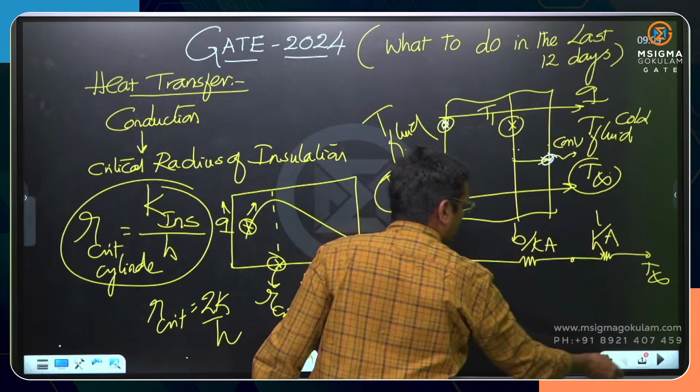For example, in the previous situation, if you had given this and this, how many resistances will be there? Only conductions. In this case, if you are given this one and this one, only 2 conduction resistances, one offered by this material and the other by the outer material. That kind of precaution we should always consider.

Then the most important topic other than this that will be asked is heat generation. In recent GATE examinations it is very commonly asked, particularly heat generation in a slab. Actually 3 geometries are there: slab, cylinder and sphere. Heat generation could happen in any of these 3 geometries, but it is most commonly asked in slab cases where uniform heat generation is assumed. Uniform heat generation, Q dot, watt per meter cube.

Okay, in GATE 22, non-uniform heat generation is asked, but that is one of the rare questions that is not generally expected. In GATE 22, if you see, there is a non-uniform heat generation. Heat generation is there, but it is non-uniform. That means at different locations, different amounts of heat are generated.

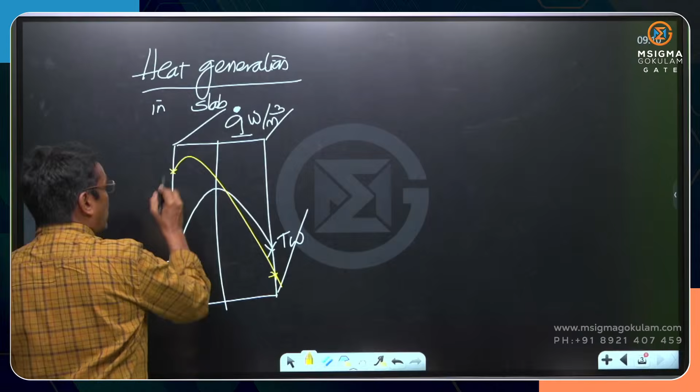But if you just think of it as uniform heat generation, any kind of situation may prevail. A symmetric parabola, in case both sides of the slab are at the same temperature, or sometimes it may be an unsymmetric parabola like this, in case this temperature is more than this. While in another case where one side of the slab is completely insulated, you may have this kind of temperature profile, but all the temperature profiles are parabolic.

Please remember that whenever you are doing a heat generation problem, the most important boundary condition to keep in mind is that the total heat generated in the entire body should be equal to the heat convected from the surface of the body to the fluid. The shape of the body could be anything, maybe a slab, a cylinder or a sphere. The total heat generated in the entire body should be equal to the heat convected to the surrounding fluid. Only then can steady state conditions be maintained.

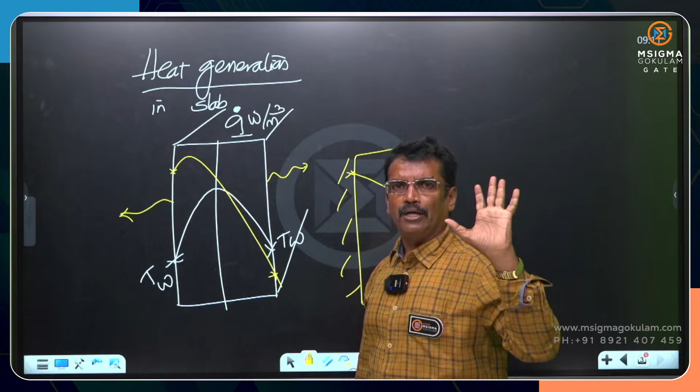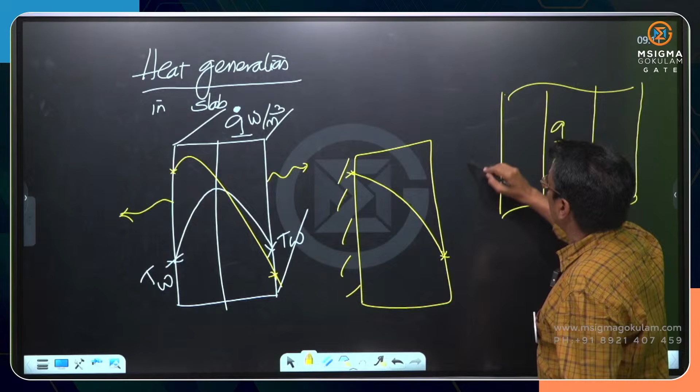This is the most important boundary condition we have to keep in mind, based on which there was a question asked in the recent GATE also. Actually, the situation was like this. There are 3 slabs given, with heat generation only in the center slab. These 2 slabs are not generating heat, but there is convection happening from the 2 sides. So how do you write the energy balance? The total heat generated only in this central slab should be equal to the heat convected from the left side plus the heat convected from the right side.

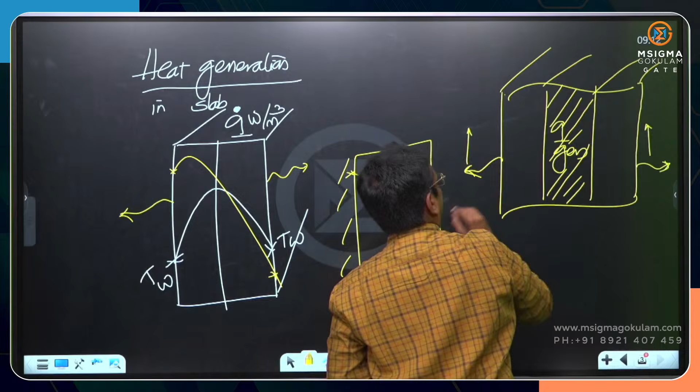There is no heat generation in these 2, but if you take the whole combined 3 slabs together as the control volume, for the steady state situation, because heat is generated only in the central part, this total heat generated should be equal to the heat convected from the right side plus the heat convected from the left side. This kind of energy balance we have to consider, particularly whenever you deal with heat generation inside a slab. Mind that if one side of the slab is completely insulated, at that location we obviously get the maximum temperature.

Generally what they ask is, in heat generation cases, where do you observe the maximum temperature and how much will the maximum temperature be? That is the very commonly expected question. At what location within the slab do you see it? Supposing the temperatures on both sides are the same, you will definitely see the maximum temperature at the mid plane, where there is a symmetric parabola.

If it is an unsymmetric parabola where these 2 temperatures are different, you will see the maximum temperature in the part of the slab where you observe more temperature. So here T1 is more than T2. You will see the maximum temperature in that portion of the slab which is closer to the higher temperature. But this is an unsymmetric parabola. If one side of the slab is insulated, this is also a parabola, but you will see the maximum temperature at the insulated surface. So these are the important cases you need to remember.

Okay, this is a very important case. You may expect the question, but all the questions are solved from this differential equation only. d²T/dx² + q̇/k = 0; this is the beginning point for steady state one-dimensional heat conduction with uniform heat generation. This is the starting equation: one-dimensional, steady state, uniform heat generation.

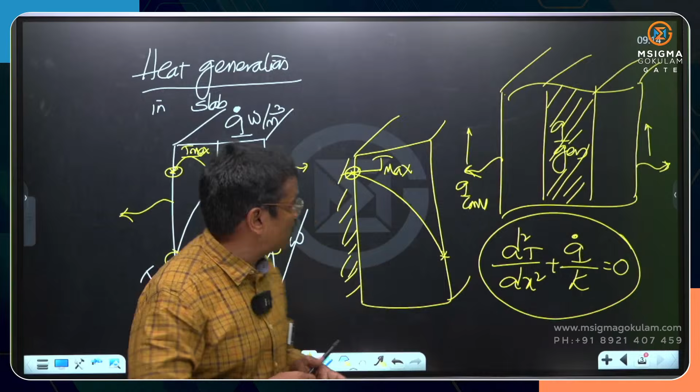But when you integrate that, you will get 2 constants of integration, because this is a second order differential equation. Those 2 constants of integration must be wisely evaluated from the given boundary conditions. Boundary condition, what do you mean by boundary conditions? What is happening here? That is at the ends of the body, no?

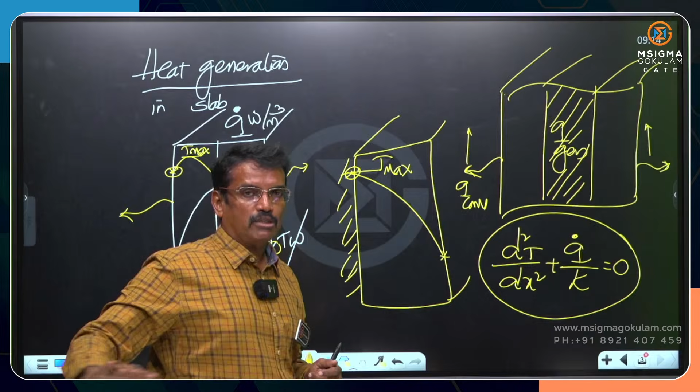But there is a boundary for every surface. What is the condition prevailing there? Based on which you have to evaluate C1 and C2, the constants of integration. That is how the entire problem must be solved while heat generation is being dealt with.

Then coming to the heat generation inside a cylinder, it is a parabola. It is definitely a parabola, with the maximum temperature at the axis and the surface temperature. This symbol is exclusively for the heat generation, uniform heat generation. So this is the fluid temperature.

What is the energy balance? Q generated is equal to Q convected from the surface, based on which you have to calculate TW, the surface temperature of the wire, and the temperature difference. It is always given by T naught, but where would you see the maximum temperature? At the axis. That will be given by Q dot R square by 4K.

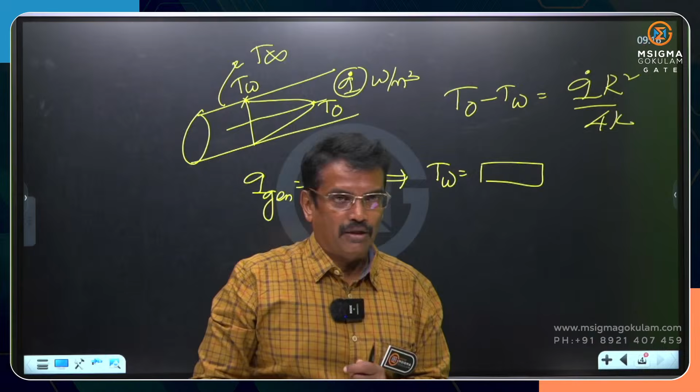So just try to write all the formulae in a concise and very precise manner, considering each topic. Say for example, if you take conduction, the heat generation cases are 3: slab, cylinder and sphere. Just write the 3 formulae, and the question is most likely to be expected, particularly in the conduction chapter. Okay, this is the temperature difference between the axis and the surface.

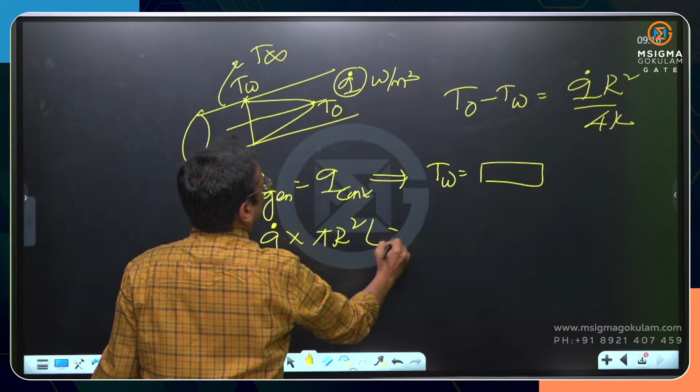Then you may ask, how to get the surface temperature? That is obtained from the total heat generated. What is the total heat generated? Q dot, which is always given per unit volume, into pi R square L is equal to H into 2 pi RL. That is the convection area from Newton's law of cooling.

Because whenever you talk about convection, what law comes to mind? It is Newton's law of cooling. From that, you will be calculating the wall temperature. Once you get the wall temperature, you can get the axis temperature, which is the maximum. Parabolic only. This is also parabolic.

Please remember, whenever you are dealing with heat generation in any body, the temperature distribution by default will be parabolic. Whether it is a slab or a cylinder or even a solid sphere, it is also parabolic. Here the maximum temperature is at the center, and the surface temperature is TW. But here the temperature difference is Q dot R square by 6K.

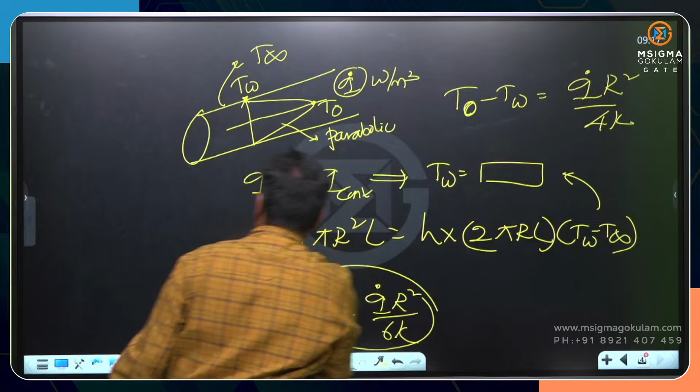6K here. Here it is 4K. This is a sphere, whereas that is a cylinder. Slab also I have shown. So heat generation is a very important topic in conduction.

Then another important thing is fins. In the fin cases, only remember the second case, insulated tip. That most commonly will be asked. Only 2 formulas: square root of HPKA into T naught minus T infinity into tanh ML, hyperbolic tan. M is the root of HP by KA.

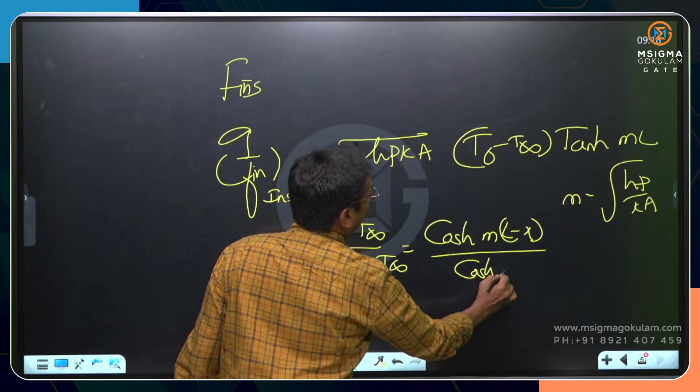Generally in fins, the things most likely to be asked are the heat transfer rate and the temperature distribution, T minus T infinity by T naught minus T infinity, which is a hyperbolic cos function. Just try to remember this formula, only for the insulated tip case, very commonly asked.

So the idea of this last 12 days preparation will be to give more focus to certain areas where questions are very commonly expected in GATE. Okay, so M is the root of HP by KA, but take care of the units there. A is the profile area or the cross-sectional area, and P is the perimeter, right?

So from this we may get the temperature, and 2 other things are there: efficiency of the fin and effectiveness of the fin. Efficiency is tanh ML by ML. All these formulae hold good only for the insulated tip case, where the tip is not losing any heat by convection. Effectiveness is Q with fin by Q without fin.

This is also another important formula that may be asked: Q with fin by Q without fin. What is efficiency of the fin? Q actual divided by Q maximum possible.

The definitions, just remember the definitions. What is actually happening? That is the actual. What could be the maximum possible? When will the maximum possible happen? Only when the entire fin is at the same base temperature, at the root temperature. So the maximum possible heat transfer rate can happen from the fin only when the entire fin is at the root temperature or the base temperature.

That is when the material of the fin has got infinite thermal conductivity. Only when the conductivity of the fin material is infinity will the whole of the fin be at the root temperature or the base temperature. Then the heat transfer rate happening under that condition is the maximum possible. What is actually happening is, the material will have a finite conductivity. Under that finite conductivity case, this is actual.

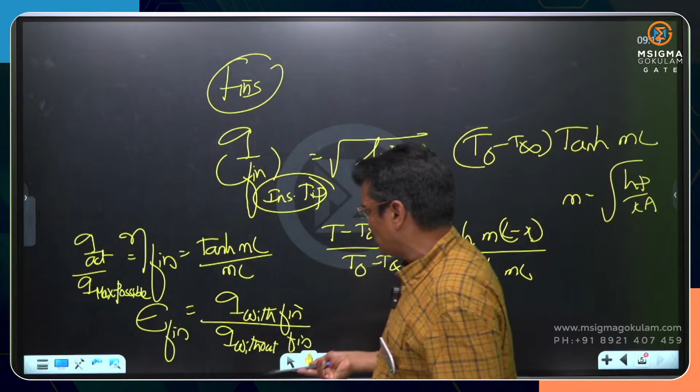The ratio of actual to maximum possible is the efficiency of the fin, and this is the effectiveness of the fin. Both are different, okay. So these are the things that may be asked in the fins there. And above all, in the conduction chapter, the most important topic that may be asked is the lumped heat analysis, where we talk about the Biot number. The condition for the lumped heat analysis is Biot number should be less than 0.1.

The definition of the Biot number also remember. The definition formula is hS by K of the solid. This is the formula for the Biot number. Lumped heat analysis is a very commonly asked question in the conduction chapter of the heat transfer subject. And what is the significance of lumped heat analysis? Temperature is only a function of time; no internal temperature gradients, no internal temperature differences. That is the meaning of lumped heat analysis.

This is the condition: Biot number should be less than 0.1. What is the definition of the Biot number? hS by K. But that S will be taken wisely. S will be volume by area. The S of the sphere will be R by 3 for the spherical body. And in one of the GATE examinations, what is the S for the plate? If this is a thin plate of thickness L, S will be L by 2, for a thin plate which is convecting heat from both sides. So S will be selected for different geometries.

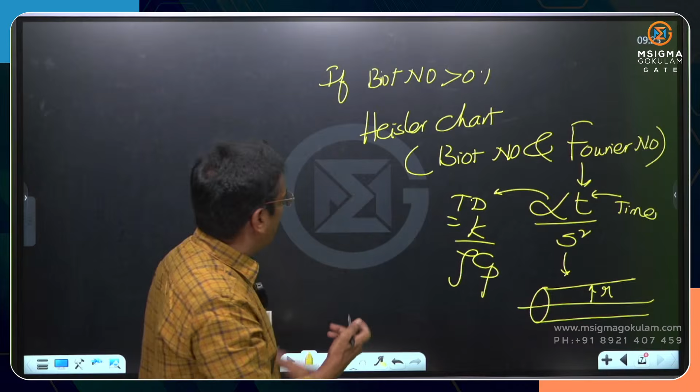Then coming to the easiest topic, heat exchangers. Easiest only because we have only two things there. Just revise LMTD and NTU, that's all. But take care of the special cases. What are the special cases? In case m dot h Cph is equal to m dot c Cpc, this is a very important case, very often asked in heat exchangers, which is called a balanced heat exchanger.

Particularly the balanced counterflow heat exchanger is a most commonly asked question, wherein this is the only case where you see the temperature profiles as straight lines. Balanced counterflow heat exchanger, what will happen there? And in case one fluid is undergoing phase change, for example steam is condensing and cooling water is getting heated up, this is a special case.

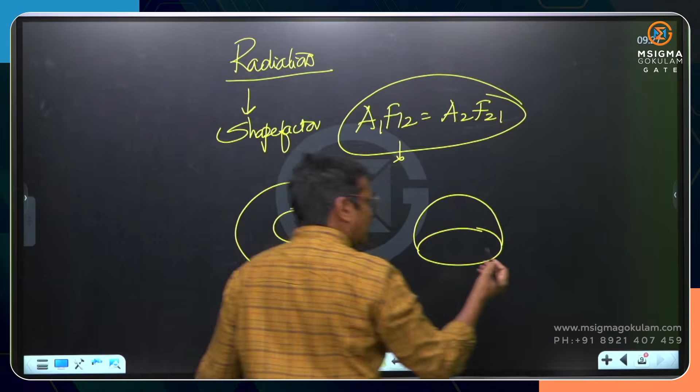The geometry could be anything. You may have two concentric spheres, a circular plate surrounded by another surface, two infinitely long concentric cylinders, or a hemispherical shell with a spherical body inside. But for all of them this is a rule: when one body is completely surrounded by another, the shape factor of the inner body with respect to the outer body is equal to 1. Remember that.

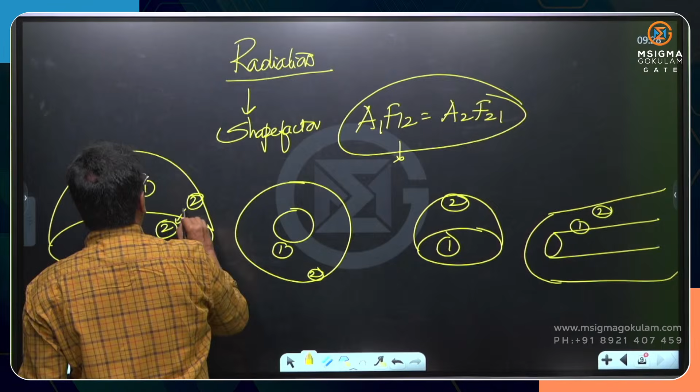In all these cases F12 is 1; for the very long cylinders F12 is 1. Here the inner body is 1, the outer is 2, and F12 is 1. So you can easily calculate F21 based upon the areas. Please revise this; you are almost sure to get one question from it.

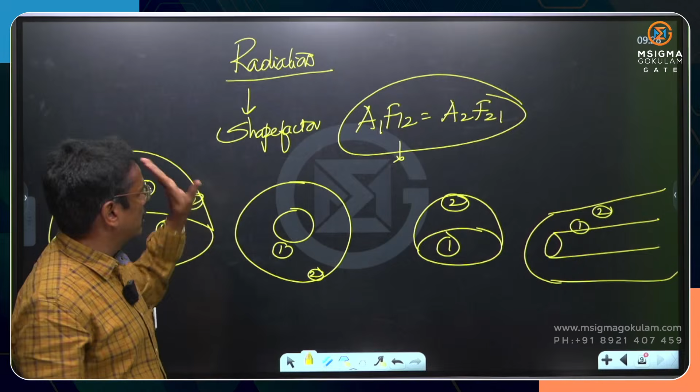And then Wien's law and Stefan-Boltzmann law. These are the very important things you may expect in GATE regarding radiation. Lambda m into T is equal to constant, for a black body. For a black body, the monochromatic emissive power could be indicated with respect to lambda for three different temperatures, T3 greater than T2 greater than T1.

This is the variation of lambda m. See that as the temperature is increasing, lambda m is getting reduced. Lambda m is the wavelength at which E b lambda is maximum at a given temperature. Lambda m into T is equal to constant. That is a usual question expected on the radiation laws.

And Stefan-Boltzmann law, we know E b is sigma T to the power of 4, b for the black body. See, the central concept of radiation heat transfer is the black body. A black body has three characters: perfect absorber, ideal emitter and also diffuse in nature. So for the black body, all these laws were stated: Wien's law, Stefan-Boltzmann law and Planck's law of radiation. All three are intertwined laws.

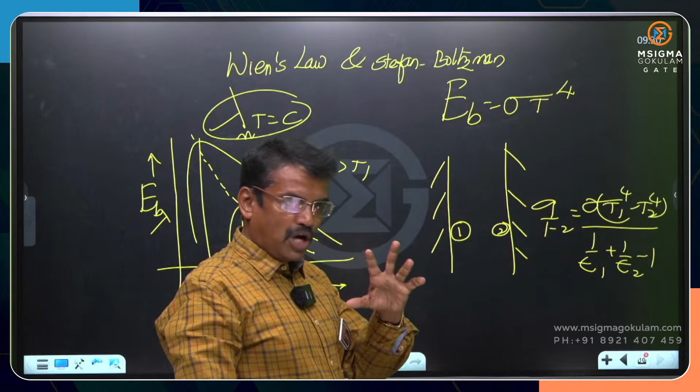Only one formula you just remember: sigma (T1 to the power 4 minus T2 to the power 4) divided by (1 by epsilon 1 plus 1 by epsilon 2 minus 1). This is 1, this is 2. These are emissivities, these are temperatures. The only precaution in radiation problems is to consider all temperatures in Kelvin; never write the temperatures in Celsius. This is a very commonly asked question, radiation heat flux between two infinitely large planes.

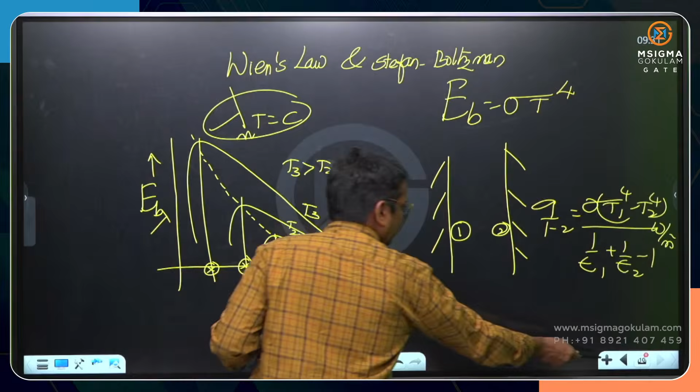Another important case is for infinitely long cylinders. If this is 1 and this is 2, it can be applied to any situation where F12 is 1 and F21 is less than 1. For all these situations, this formula is valid, for example infinitely long concentric cylindrical surfaces. This is epsilon 1, this is epsilon 2, this is T1, this is T2.

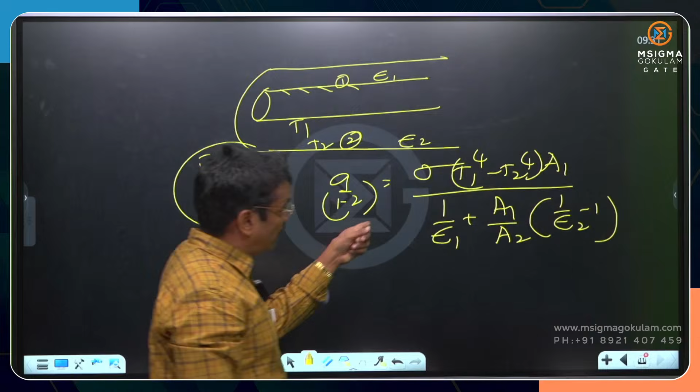Remember this formula. It becomes very useful if A1 is far less than A2. Then A1 by A2 tends to 0, and epsilon 1 goes up to the numerator. That means a small body kept in a large enclosure, where this formula becomes very useful. But this formula is valid for all cases whenever these two conditions are satisfied.

Then comes the radiation networks, where we define the surface resistance and space resistance. Construction of the radiation network is very simple if you understand the basic concept. Surface resistance is 1 minus epsilon 1 by A1 epsilon 1, space resistance is 1 by A1 F12. Only two kinds of resistances will be there. Generally there are two surfaces, sometimes three may be given. In recent GATE examinations, they have given three surfaces.

There are three surfaces exchanging heat: this is 1, this is 2, and this is 3. For drawing the radiation network, put one surface resistance on every surface. Between any two surfaces, keep the space resistance. That's it. Very easy to draw the network if you have some idea about these resistances.

Put one surface resistance on every surface, because the name itself suggests the resistance exists on the surface of the body. Every surface has a surface resistance. Between any two surfaces exchanging heat by radiation, there will be a space resistance. So give extra attention to drawing radiation networks. Luckily, if the body is black, the surface resistance becomes 0. Why?

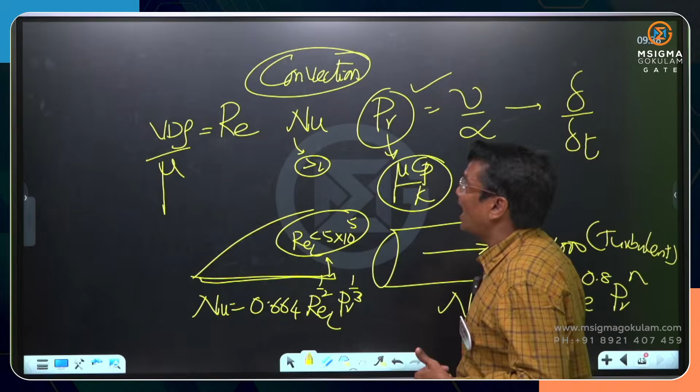And in free convection, there is only one number, that is the Grashof number, only in free convection. Revise that free convection definition, okay. Buoyancy force divided by viscous force. Some books will give it as inertia force into buoyancy force divided by viscous force whole square, but this definition is more prominent. This is the number that will replace the Reynolds number in free convection.

So, convection is all about the dimensionless numbers and the decision of laminar or turbulent and the relevant formula to apply. Okay. The very commonly asked question in convection is regarding the Prandtl number. So, n number of times questions were asked on the Prandtl number. So, this is all about heat transfer.

Coming to another important subject, thermodynamics, TD. In thermodynamics, the questions very often come from the first law and second law of thermodynamics. When you talk about the first law of thermodynamics, whenever you are attempting a thermodynamic problem, make sure what kind of system you are dealing with, whether it is a closed system or an open system, number one. What kind of working fluid you are dealing with, whether it is an ideal gas like air or a pure substance like steam or a refrigerant.

The third thing is what kind of process you are dealing with. Is it reversible? Is it quasi-static? Or is it irreversible? Try to make a judgment. Sometimes you may not be aware what kind of process is there. It may not be given. So make 3 inquiries about the thermodynamic problem: nature of the system, nature of the process, and nature of the working fluid. Very luckily, in most cases it may be air. Air is an ideal gas.

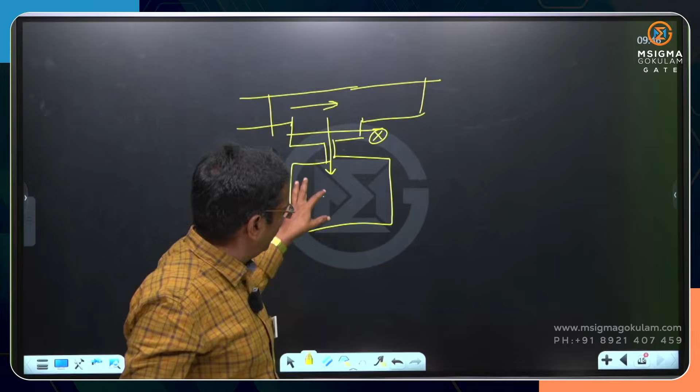Please remember the unsteady state. It is quite easy; only one equation you need to remember. It may be filling or emptying of the flask. Sometimes the flask is being emptied, with some fluid getting out through a valve. They will give the initial and final states and ask what is the mass of the fluid that has left the container. So that is regarding the energy balance.

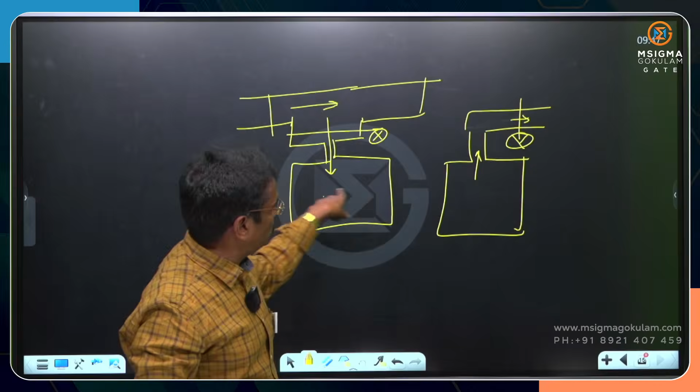After all, the first law of thermodynamics is the law of conservation of energy, which may be written for a steady or unsteady state. These two are the unsteady state situations: filling of the container, or emptying the container, or fluid going out of the container. So this is all about the first law and the law of conservation of energy.

Then, more important than the first law is the second law and entropy. Thermodynamics weightage is around 6 to 7 marks. Heat transfer weightage is around 8 to 9. Thermodynamics will be around 6 to 7 marks, 7 marks we can say. But most of the questions will be asked either on the first law or the second law and entropy. Second law and entropy come under one.

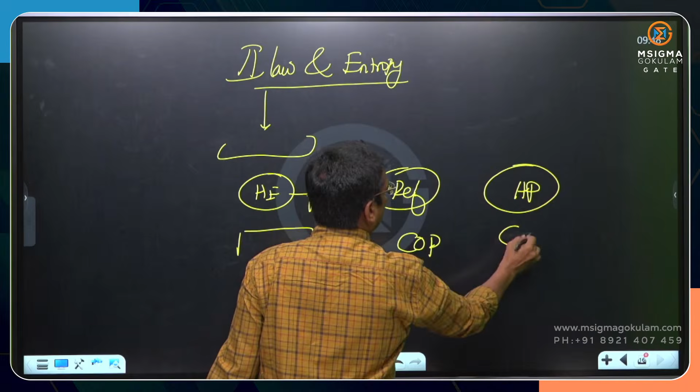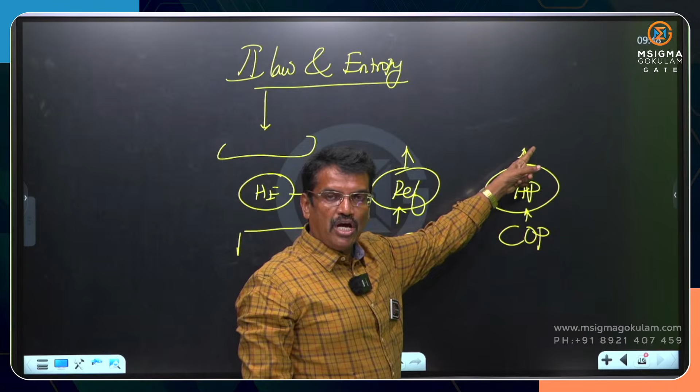Here the main thing in the second law is just to revise the heat engine concept, the refrigerator concept and the heat pump. For all the devices, you have to get the thermal efficiency and COP, how to calculate the COP for the heat pump. Refrigerator and heat pump both belong to the same category, obeying the Clausius statement of the second law, but based upon the useful effect, we call it a heat pump or a refrigerator. In the heat pump, the heat rejected is the useful effect wanted. In the refrigerator, heat absorbed is the useful effect wanted. But both require work to be done. They are work absorbing devices, whereas the heat engine is a work producing device.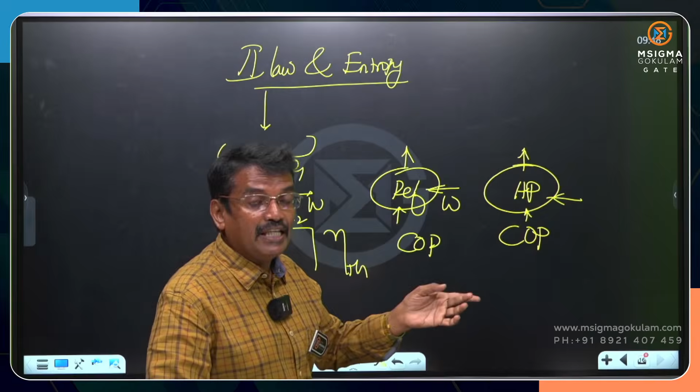Here we define the thermal efficiency. Just recall those definitions: thermal efficiency and COP. For any refrigerator, any heat pump, any heat engine, we have general definitions of efficiency and COP. In case those machines become Carnot, you know that the thermal efficiency of the Carnot engine will be in terms of TH and TL, only temperatures. This is the reversible heat engine or Carnot heat engine. And for a refrigerator there is the COP of the Carnot refrigerator. Remember them, recall them: Carnot refrigerator, COP of the Carnot heat pump.

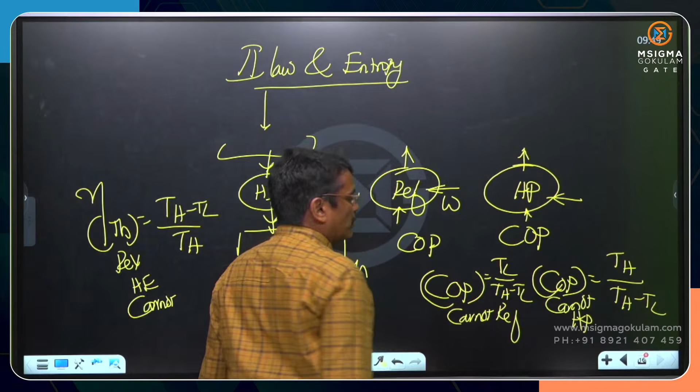For the reversible refrigerator, the COP is TL by TH minus TL, where TL is the low temperature and TH is the high temperature. For the heat pump, this is TH by TH minus TL. So if you add 1 to this, you will get the COP of the Carnot heat pump. COP of the Carnot refrigerator plus 1 will be the COP of the Carnot heat pump, right? There are certain formulae which can be written for any heat engine, any heat pump, and any refrigerator to get their efficiency or COP.

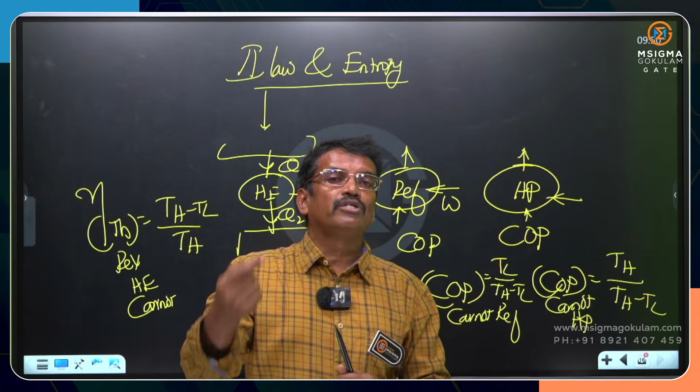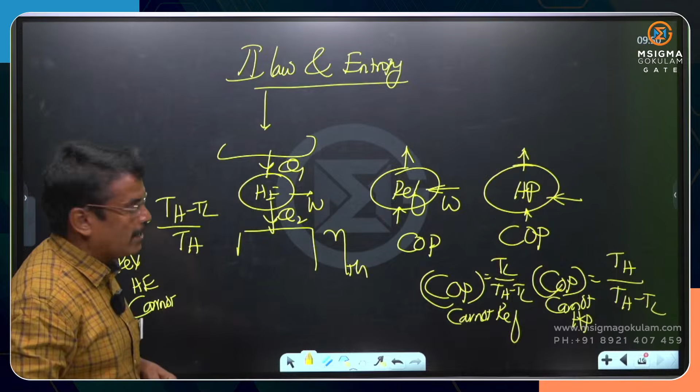But when you talk about the Carnot machine or a reversible machine, those formulae will be in terms of temperatures in Kelvin only. Keep all these temperatures only in Kelvin. Carnot formulae are all in Kelvin only. So that distinction should be made. Most of the time, they will ask about a heat engine driving a refrigerator, or a heat engine driving a heat pump, because the heat pump requires work, and the heat engine gives work, which will be supplied to it. So in these combination problems, one machine will be driving the other.

They may ask how much heat must be supplied to get this much heat rejection. Then you may have to use the general definition of the efficiency of this and the COP of this. Sometimes one machine may be Carnot, either the heat engine or the heat pump. When Carnot comes, you can write in terms of temperatures in Kelvin. If it is not Carnot, don't write in Kelvin, write only in terms of the energies. If you take this heat pump, what is its COP? Q rejected divided by work. These combinations are very commonly asked, and sometimes they use words like: what is the minimum work required? What is the maximum heat rejected?

When you read words like minimum work required, or maximum work obtainable, minimum or maximum words in the problem, guess that the machine may be working on the Carnot cycle, because only Carnot machines have maximum thermal efficiency if it is a heat engine, and maximum COP if it is a heat pump or a refrigerator. Only Carnot machines have the highest performance, whether it is a heat engine, a refrigerator, or a heat pump. So try to make that judgment. If you read minimum or maximum, think that the machine may be a Carnot.

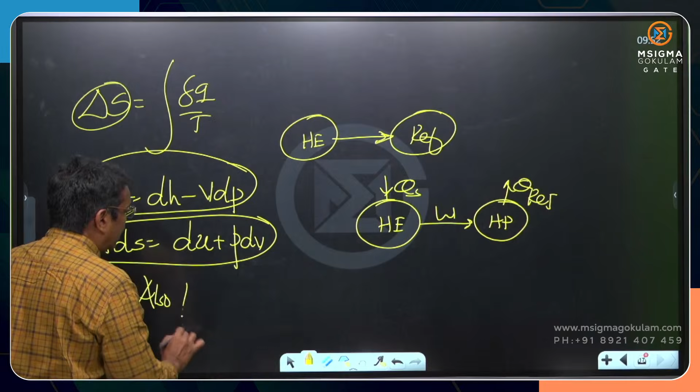And also for an ideal gas, dH = Cp dT, and dU = Cv dT. So these relations we may use here to get the change of entropy after integrating, because they are applicable for any pure substance, any thermodynamic process. Remember, these two relations, also called the TdS equations or the Gibbs equations, are valid for any thermodynamic process undergone by any pure substance, whether the process is reversible or irreversible. So this technique you have to use for calculating the change of entropy.

Another important thing is the Clausius inequality. The cyclic integral of δQ/T is less than or equal to 0. Less than sign for an irreversible cycle, equality sign for a reversible cycle. This holds whether it is a clockwise or anti-clockwise cycle. Clockwise cycle means a heat engine cycle. Anti-clockwise cycle means a refrigerator or heat pump cycle.

Give more focus to the Clausius inequality, because generally they will give one machine, maybe with 3 reservoirs like this, T1, T2, T3. We don't know whether it is a clockwise or anti-clockwise device; they just give a device. First they will ask you to check whether it is reversible or irreversible. They give these heat transfers Q1, Q2, Q3, and you have to follow the sign convention: when heat is supplied, positive; when heat is rejected, negative.

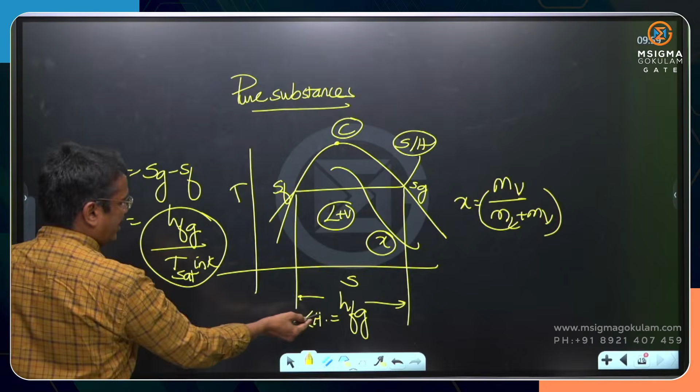When you are dealing with pure substances, we have to be very thorough with the dryness fraction, critical point, and above all, the triple point. Questions are asked repeatedly about the triple point. This is the fusion curve, this is the boiling curve. This is solid, this is liquid, this is vapor. All three phases coexist in equilibrium at the triple point. Questions are asked very often on the triple point.

What is the significance of the triple point? At the triple point, all three phases, solid, liquid and vapor, can coexist in thermodynamic equilibrium. Okay. And I have also solved a question about the triple point recently, about 10 days ago, when I gave the ISRO solutions.

In the very first thermodynamics question I solved, the same question was asked in GATE 21 regarding the triple point of ammonia. You may see that video also. I gave the ISRO solution 10 days ago. There is one question regarding the triple point of ammonia in Kelvin.

So they picked up the same question from GATE 21. What is the triple point? The triple point is where all three phases, solid ice, liquid water and water vapor, in the case of water, can coexist in thermodynamic equilibrium, and that is the reference state for measuring the properties of steam.

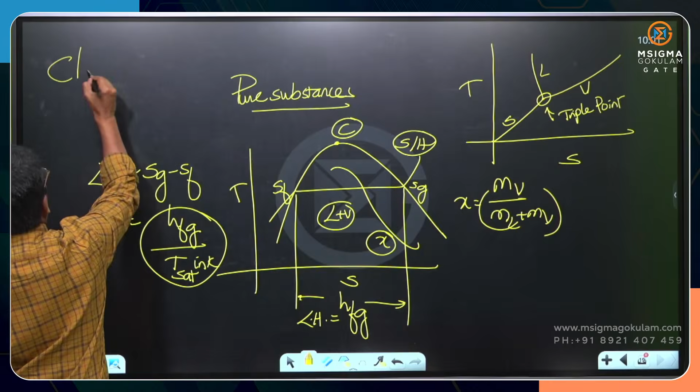Clausius-Clapeyron, that is the equation they are asking in properties of pure substances, that is dP by dT, the variation of the saturation pressure. It is given by h_fg by T_sat into v_fg. This is a specific value. This is the Clausius-Clapeyron relation for calculating the variation of the saturation pressure with saturation temperature.

For any pure substance, you remember that as the saturation pressure increases, saturation temperature also will increase. For any pure substance like water and refrigerant, as the P sat increases, T sat also will increase. So these are the very probable areas that may be asked in GATE regarding thermodynamics.

Coming to the third subject, very important subject, where the weightage may be around 7 to 8. Please give more focus to fluid kinematics. There will be many questions from this. When you talk about fluid kinematics, the very first thing we define is the streamline. What is that? What is the equation of the streamline?

Generally a flow field will be given, u i plus v j for two-dimensional flow. They will ask you to get the equation of the streamline. You will be given that function in terms of x and y. For two-dimensional flow, how to calculate the equation of the streamline, the velocity potential, stream function, convective and local accelerations, ax and ay. Give that more focus.

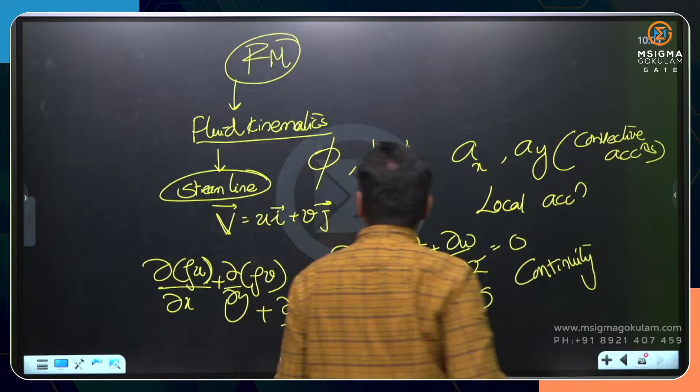As far as FM is concerned, please give more attention to velocity potential, stream function, condition for irrotationality. When do you call a given fluid flow irrotational? When it satisfies the Laplace equation, or when all three rotation components omega x, omega y and omega z are equal to 0. Mostly they will ask two-dimensional flows to make the problem simple, so just check omega z is equal to 0. For a two-dimensional flow on the xy plane, calculate omega z, the rotation component about the z axis. If it is 0, declare that flow irrotational, or otherwise find out the velocity potential.

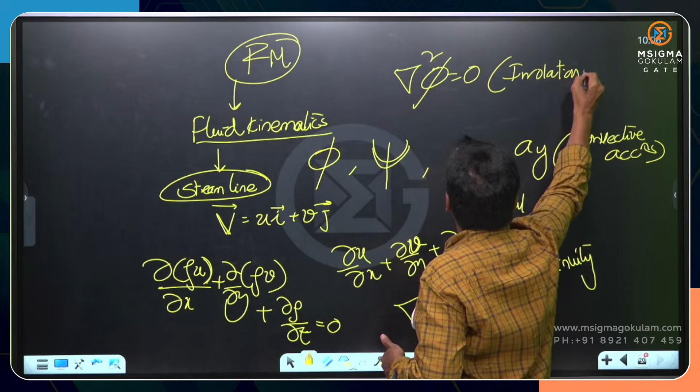If it satisfies the Laplace equation, del square phi is equal to 0, then the flow is irrotational. So the check for irrotationality is a very commonly asked question in GATE.

All the questions revolve around the equation of the stream function. If the velocity potential is given, how to calculate the velocity of the fluid at a particular point, how to calculate the accelerations along x and y directions. So give that area extra focus. Coming to the fluid dynamics part, nothing is more important than Bernoulli.

Bernoulli's equation is a central concept in fluid dynamics. It may be asked how to write that. The question may be asked like this: what is the velocity leaving, what is the discharge that is leaving, questions like that.

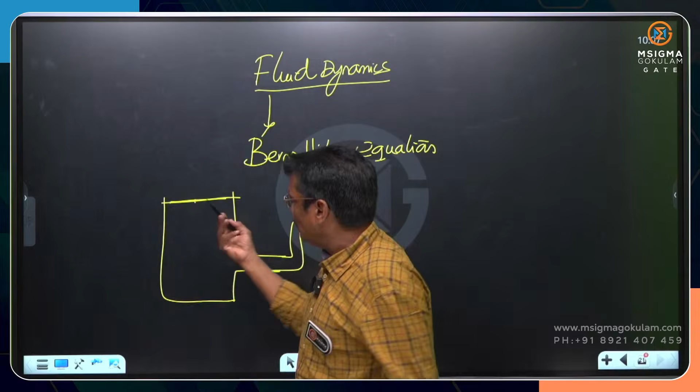Generally, when you are writing Bernoulli's equation, try to choose points which are open to the atmosphere, number one, and try to choose a point in a large area. If this is a large area, what is the velocity there? 0. What is Bernoulli's equation? P by w plus V square by 2g plus Z is equal to constant.

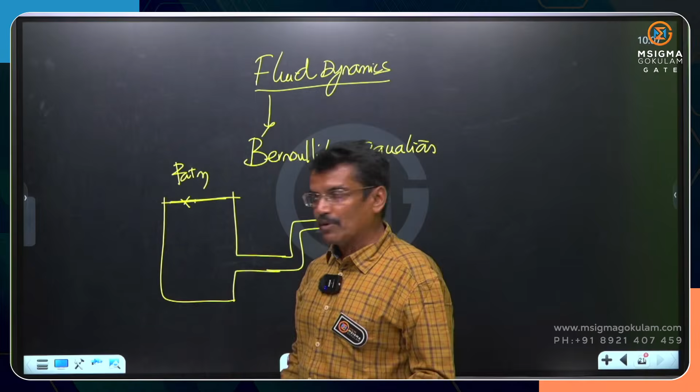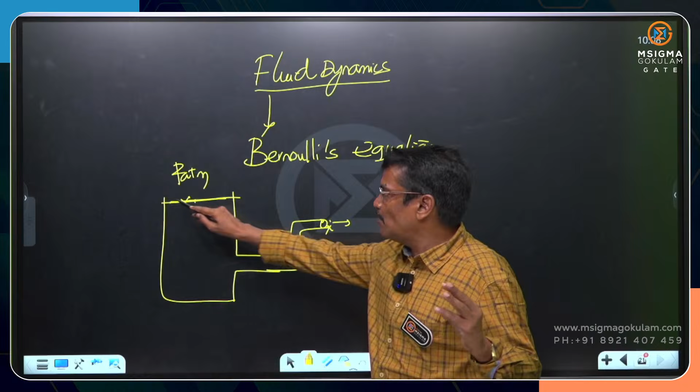Okay, when you take a point open to the atmosphere, then we are already aware of the pressure there, atmospheric pressure. If it is not given, take it as 101.3 kilopascal absolute. And if you are taking another point here, open to the atmosphere, here also the pressure is atmospheric. Therefore, many things will become easy to solve if you select those 2 points which are open to atmosphere, number one. If it is a large surface, obviously the velocity there becomes 0. One component has become 0.

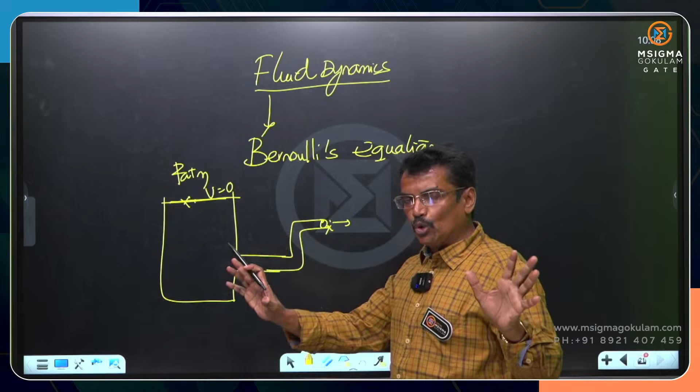Because Bernoulli's equation contains pressure head, velocity head and datum head. The sum of these 3 heads will be equal between any 2 locations if there is no loss of head. Sometimes Bernoulli's equation may be asked like this. They will give a pipe, give 2 locations, and ask you to decide the direction of the flow. Generally, you have to answer that the flow is always from a location where the total head of the fluid is greater than the total head at the other location.

Supposing the total head at one is more compared to the total head here, the flow is like this. What is the total head? P by W plus V square by 2G plus Z. So calculate at both the locations and decide the direction of the flow. Similar things they will ask from the thermodynamic point of view. Now they don't give water, they will give steam or gas. They will mention location 1 and location 2: whether the flow is from 1 to 2 or 2 to 1.

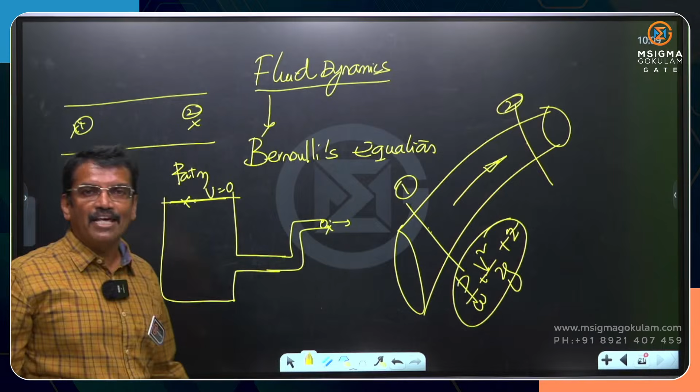It is an adiabatic device, they say, because in an adiabatic device entropy can never decrease. Questions asked about entropy can be very confusing and need critical thinking. With all my experience, I can definitely say that a person who clearly understands the concept of entropy understands the whole of thermodynamics.

Supposing he has given some ideal gas, air, with 2 stations, station 1 and station 2, and all the properties are given. He will ask you to decide whether the flow is from 1 to 2 or 2 to 1. What to do? From the given properties, we can calculate S2 minus S1. If S2 minus S1 is greater than 0, yes, because in an adiabatic system entropy either remains constant or increases.

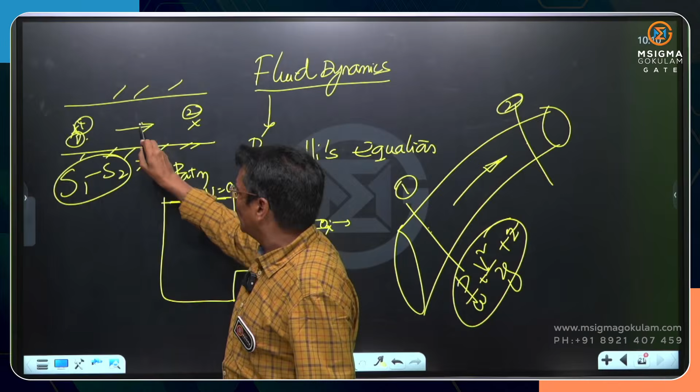But if S1 is greater than S2, the flow cannot happen in this direction. If the flow is happening in this direction, S2 should be greater than S1, or in the worst case equal to S1. It cannot be less, because that means in an adiabatic system entropy is decreasing. So the direction of the flow is decided based upon that limiting situation: in an adiabatic flow entropy either increases or remains constant.

If S2 is greater than S1, I can say the flow is happening from 1 to 2. If S2 is lesser than S1, the flow will be from 2 to 1. So that is how we have to answer the questions there. Okay.

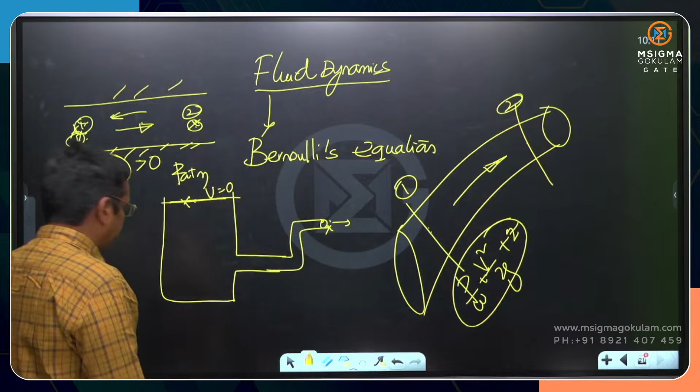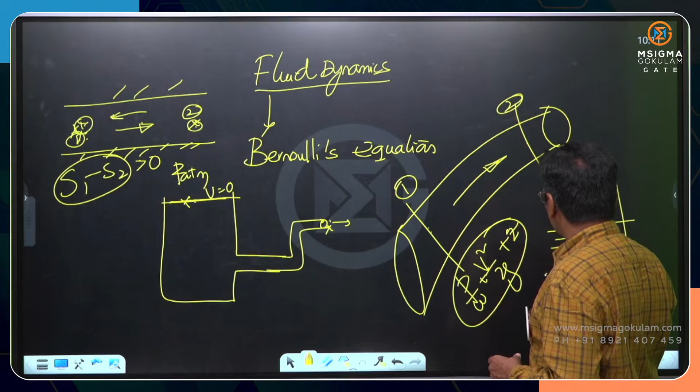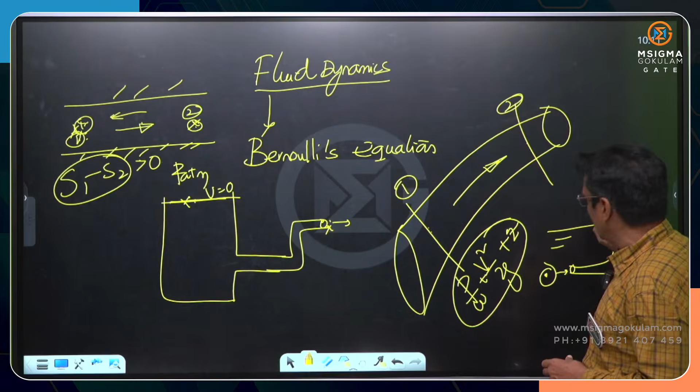Bernoulli's theorem, Bernoulli's equation: a question may be asked from the venturimeter application or a pitot tube. Very often the recent exams ask about the pitot tube. You have to write Bernoulli's equation between this location and that location. When the water enters, you have velocity head, pressure head and elevation, and here the velocity is 0 because the fluid has halted, so it has only elevation head there. So give more focus to two important devices while applying Bernoulli's equation: the venturimeter and the pitot tube, which is meant for measuring velocity.

Venturimeter is for measuring the discharge. Give a little more attention to those two devices, particularly when you are revising. Revise Bernoulli and its applications in the form of venturimeter and pitot tube.

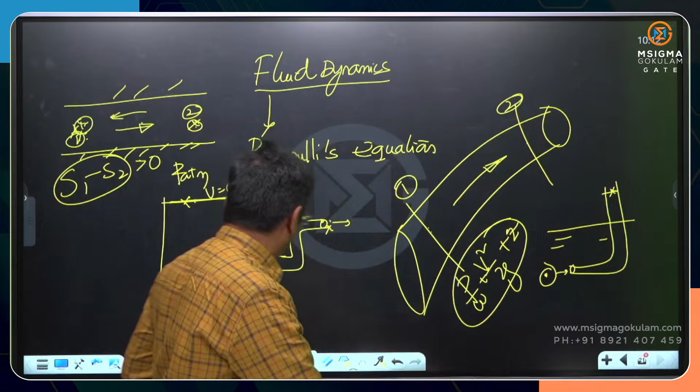Then coming to incompressible flow, a very important thing. Very commonly questions are asked, particularly about the Reynolds number. All 5 numbers you have to remember in FM: Reynolds number, Euler number, Froude number, Weber number and Mach number. All their definitions you should remember.

Euler number, inertia force by pressure force. Froude number, inertia force by gravity force. Weber number, inertia by surface tension. Mach number, inertia force by elastic force. The Mach number is important in that recently added topic called compressible flow.

First, how to calculate the Mach number: velocity of the fluid divided by acoustic velocity. This is the important number to decide whether the flow is compressible or incompressible. If the Mach number is less than 0.3, incompressible. If the Mach number is more than 0.3, compressible. Compressible flow means the number that strikes your mind is Mach number.

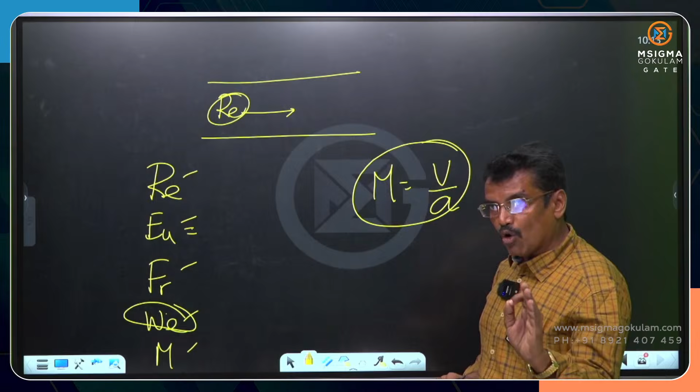Particularly for viscous flow through pipes, the main thing they may ask is the Darcy-Weisbach equation, head loss due to friction, fLV square by 2gD, number 1. Number 2, for laminar flow there is another important equation called the Hagen-Poiseuille equation, 32 mu VL by wD square. Just recall all the formulas. For laminar flow, Hagen-Poiseuille equation.

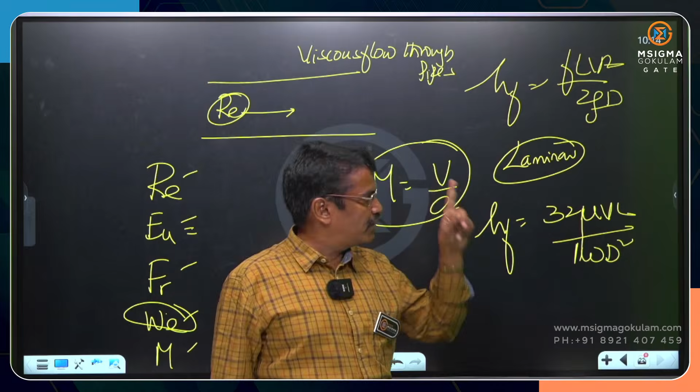Though fLV square by 2gD, called the Darcy-Weisbach equation, is for turbulent flow, many times we may write it for laminar flow also. That f is called Darcy's friction factor. Particularly for laminar flow, the friction factor is equal to 64 by Re. These kinds of relations, please remember.

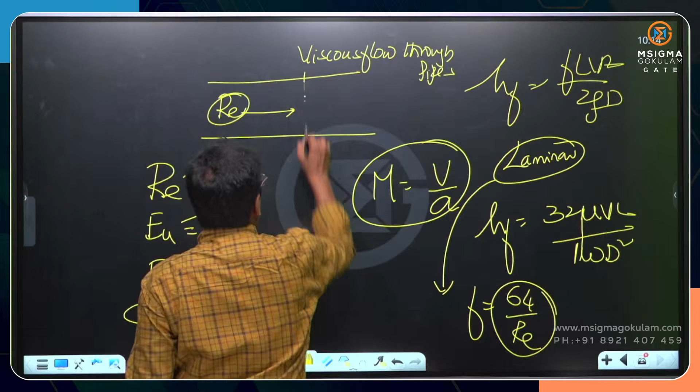And the shear stress variation and the velocity variation. We know that it is parabolic for laminar flow. If it is a turbulent flow, what is the velocity distribution? Logarithmic. If it is a turbulent flow, it is logarithmic. If it is a laminar flow, it is parabolic.

That velocity distribution is u equals minus 1 by 4 mu into dou p by dou x into R square minus r square. Recall this velocity distribution equation; in each chapter there will be around 6 to 7 formulae, just try to recall them. Minus dou p by dou x is called the pressure gradient, which is a constant, and can be taken as delta p by L, because pressure changes linearly with respect to x.

That kind of question may be asked in the objective. Shear stress varies linearly in a laminar flow. The velocity varies parabolically in laminar flow. Velocity varies logarithmically with respect to radius at a given cross section in turbulent flow. Those kinds of distributions.

How does the pressure change in the direction of the flow? How does the shear stress, which is a function of r, the radius at a given cross section, vary? Try to recall and revise them. These are definitely asked questions. They were asked and they will again be asked in viscous flow through pipes.

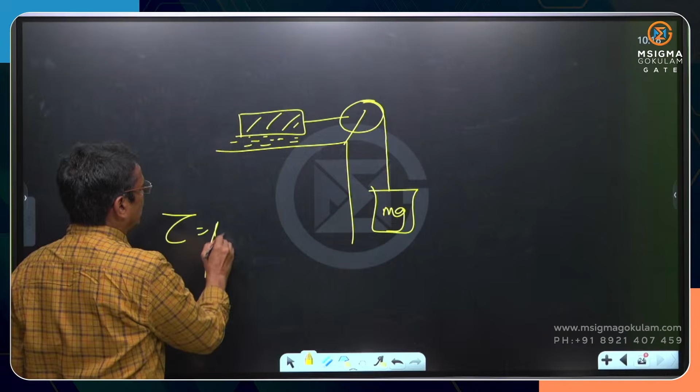When you talk about viscosity, they may ask like this: a block may be sliding over a viscous film. What is the terminal velocity of the block? Some weight will be given like this. How to write Newton's law of viscosity? Tau is equal to mu into dV by dy. So what is the velocity there? This gap will be given, and the dynamic viscosity value will be given. Otherwise, the kinematic viscosity and density will be given. Mu by rho is nu, kinematic viscosity. Mu is equal to rho into nu.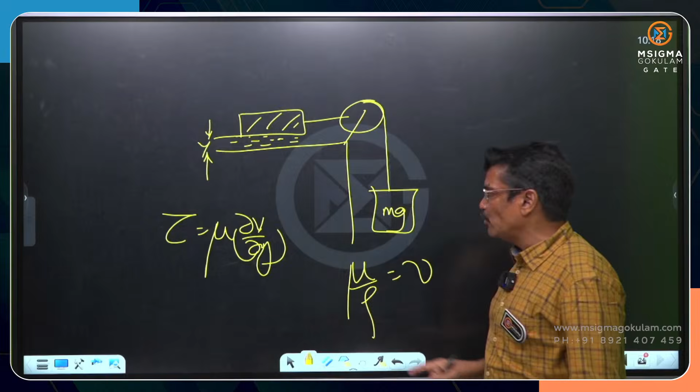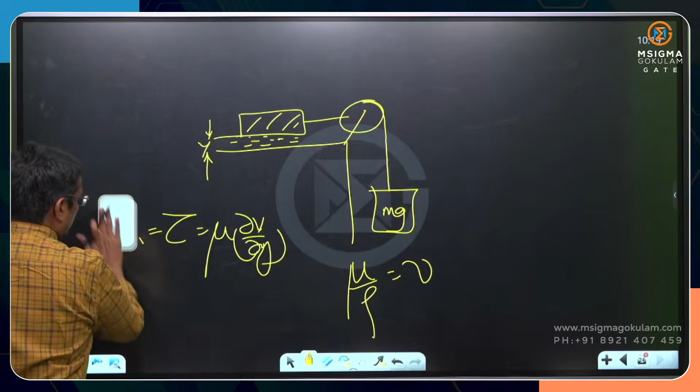So this is viscous stress, and viscous force is stress into area, like force divided by area gives the stress. You can take viscous force as the opposing force, T is the tension, and by writing the equation of motion you would be able to calculate the terminal velocity. In general, in most cases this velocity variation is taken as linear. So dV by dy, you can take it as V by y.

And buoyancy. Give more attention to buoyancy. Just carefully write the Archimedes principle, that is, the force of buoyancy is equal to the weight of the liquid displaced. And where is the center of buoyancy? More commonly, the conditions of equilibrium are asked for a floating body and for a submerged body. For a submerged body, the relative positions of center of gravity and center of buoyancy. For a floating body like a ship, how do you decide the conditions of equilibrium? The relative positions of M and G, meta-center and center of gravity. For a submerged body it will be different, for a floating body it will be different.

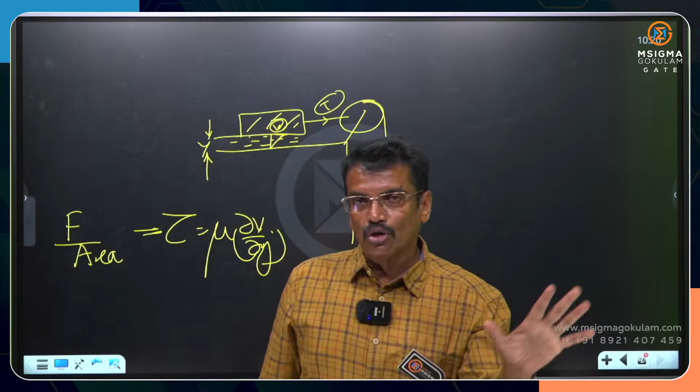Very commonly the objective questions will come from buoyancy, how to calculate the force of buoyancy and where the center of buoyancy lies. So, these are the topics where you have to focus more in fluid statics. Coming to the power plant, the most important thing is the Rankine cycle. And in the Rankine cycle, regeneration. Regeneration is very commonly, repeatedly asked. Regeneration, that is the bleeding of steam. Questions are very often asked on regeneration, bleeding of steam.

So, how much steam will be bled, how much steam will be extracted from the turbine for the bleeding. So, this is the regeneration. Please give more attention to regeneration. And how will the Rankine cycle efficiency increase? In what way can it be improved? By providing more superheating and by decreasing the condenser pressure. How to improve the thermal efficiency of the Rankine cycle? That is where they focus very often. Regeneration is a major, prime method of improving the thermal efficiency of the Rankine cycle.

Generally, by writing the energy balance and mass balance for the feed water heater used in regeneration, you can calculate how much mass of steam, for 1 kg entering, m kg is bled. What will be this m value? If 1 kg is entering, how much mass of steam should be bled or taken from the turbine? So, 3 pressures will be given: boiler pressure, bleeding pressure and condenser pressure. This is a prime area regarding the steam power plant and the Rankine cycle.

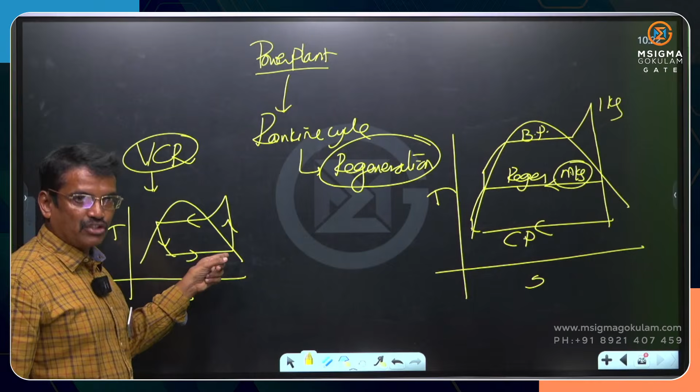To produce so much refrigeration effect, how much mass of the refrigerant is required? What is the tonnage? 1 ton is 3.5 kilowatts. They will give the tonnage capacity, and ask how much mass of the refrigerant must be circulated. That is one prime area in the VCR. Otherwise, they will give all the enthalpies. This enthalpy and this enthalpy will be different because it is a throttling process. So that area, COP definitions, tonnage and mass flow rate of the refrigerant required. Just focus on that.

VAR has never been asked in the recent past. VAR, just know about it. And air refrigeration, though it is included, is also not asked. That is quite easy. After all, the Bell-Coleman cycle or the air refrigeration cycle is just a reverse of the Brayton cycle. Gas turbine power plant: just like the steam power plant, you have the gas turbine power plant. Analysis of the gas turbine power plant is quite easy; you just need to evaluate the Brayton cycle. When you talk about the gas turbine power plant, focus on the Brayton.

And the Rankine cycle, when you are analyzing, just focus upon regeneration. How do you provide the regeneration? How much mass of the steam is bled? And the reverse of the Brayton cycle is called the air refrigeration cycle, also known as the Bell-Coleman cycle. Try to remember the COP formula in terms of the pressure ratio. And for the VCR cycle, vapor compression refrigeration cycle, you will be given all the enthalpies; how to calculate the mass flow rate of the refrigerant, given the tonnage. Just focus on that particular domain.

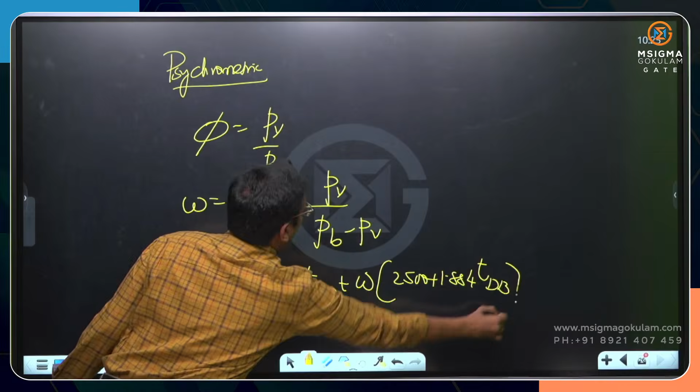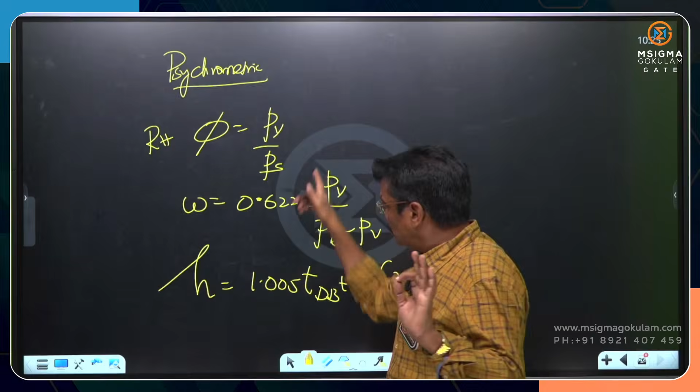And in the recent past they are asking particularly psychrometric relations. Only 3 relations, remember. Psychrometric relations: phi is equal to PV by PS, specific humidity is equal to 0.622 into PV by PB minus PV, and how to calculate the enthalpy of the moist air: 1.005 TdB plus W into 2500 plus 1.884 into TdB. This is the specific humidity or humidity ratio. This is RH, and where to take these pressures, you must be very careful. What is PV and what is PS, they will give the data in the problem.

How does the psychrometric chart look? Just give a focus on the psychrometric chart. How do the lines look? Constant enthalpy lines, constant wet bulb temperature lines. How to read various properties on the psychrometric chart, just have a look at them. If you just spend 5 to 10 minutes on the psychrometric chart, you can easily recall that, and these three relations, and again psychrometric processes.

All the psychrometric processes: sensible heating, sensible cooling, cooling with dehumidification, heating with humidification, adiabatic humidification, chemical dehumidification, what will happen to each psychrometric property. They may ask: in a chemical dehumidification process, what will happen to the dew point temperature? How to locate the dew point at a given psychrometric state? How to read the DBT, the WBT, the DPT.

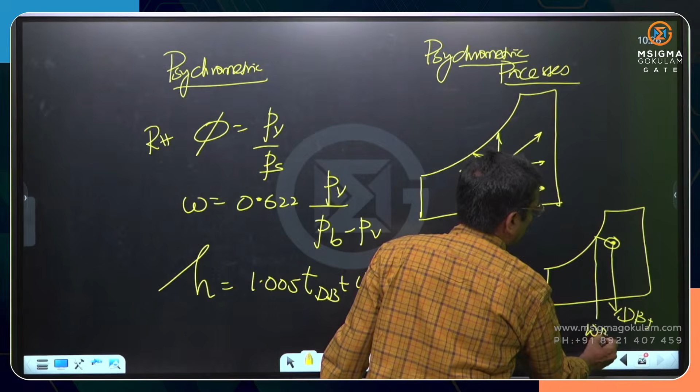Try to recall that. For unsaturated air, DPT is always less than the wet bulb temperature, less than the DBT. When the relative humidity is less than 100%, the lowest is the dew point, highest is the DBT, and in between you have the wet bulb temperature. So in the chemical dehumidification process, what will happen to the DPT? Or in the adiabatic dehumidification process, what will happen to the RH value?

Or in an adiabatic humidification, where the wet bulb temperature remains constant. Very commonly that is asked. The most commonly asked process in psychrometrics is adiabatic humidification, also called humidification without heat transfer. Very commonly asked.

In that process, the wet bulb temperature remains constant, and also the enthalpy of the moist air remains constant. The main two properties remain constant during this adiabatic humidification. One is enthalpy and the other is wet bulb temperature, and that process is very frequently asked in psychrometry.

Okay, and as far as the refrigerants are concerned, environment friendly, because the refrigerant which doesn't contain chlorine has got a zero ozone depletion potential, which means it won't damage the ozone layer since it doesn't contain chlorine. Make use of that formula like R113, R134. How to write the formula? Okay, there is a simple technique.

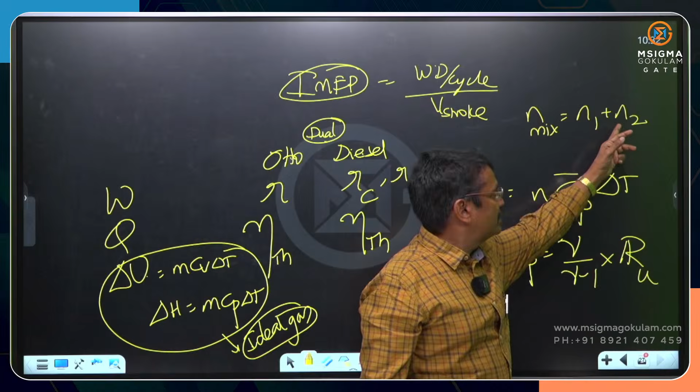And whenever you are dealing with mixtures of ideal gases, you always write the number of moles of the mixture is equal to N1 plus N2. If 2 gases are being mixed, what is the final number of moles? The number of moles of gas 1 plus the number of moles of the second gas. And PV equals nRT holds good for any ideal gas, need not be air.

And that PV is equal to nRT combined with this mass conservation; given all the data, we can calculate anything. Okay. When you are doing the problems, you may be writing the conservation of mass: sometimes M1 plus M2 is equal to the mass of the mixture. That is one way. Another thing is the number of moles of the mixture is the number of moles of gas A plus the number of moles of gas B. That you need to use, particularly when you are dealing with mixtures of ideal gases, as clearly mentioned in the GATE syllabus. Okay.

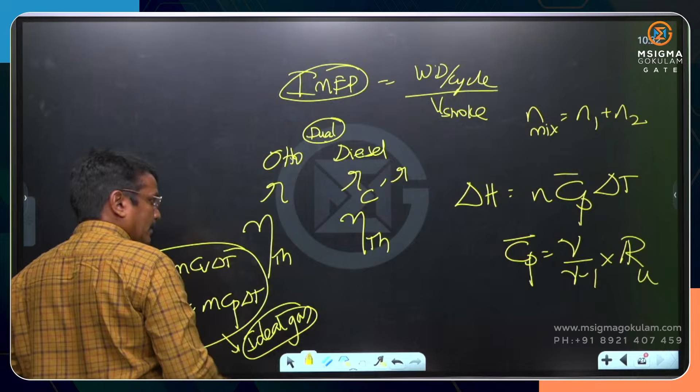This is one particular domain, and coming to the second domain, called mechanics and design, the most important subject there is strength of materials, SOM. When you talk about SOM, the guaranteed question is principal stresses and strains, Mohr circle.

That is a sure question, because when a solid element is subjected to biaxial normal stresses as well as shear, that is sigma 1, sigma 2, two normal stresses as well as the shear stress, how to draw the Mohr circle, and how to calculate the normal stress and the shear stress on any plane inclined at an angle of theta. Okay. This formula please remember.

How to draw the Mohr circle and what is the radius of the Mohr circle will differ in different situations. Sometimes you will have only one normal stress and only one shear; in such a case, sigma 2 becomes 0. Sometimes if one is compressive, take it as negative and the other as positive. We have a sign convention: one is tensile and the other is compressive, one is positive and the other negative. If both are tensile, both signs are positive, follow the sign convention, and the shear will be there.

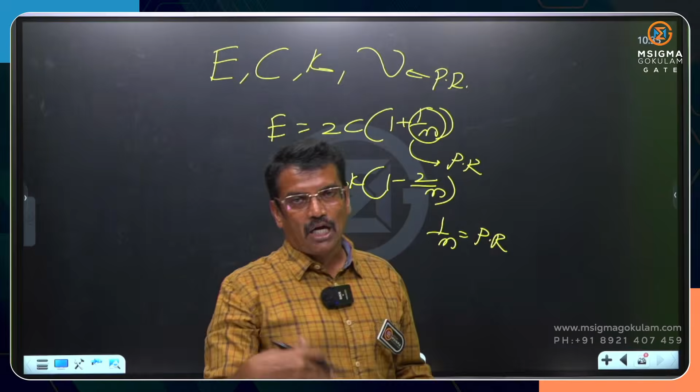Now we have E, C, K: Young's modulus, shear modulus, bulk modulus, and Poisson's ratio, defined as lateral strain by longitudinal strain. Those are four elastic constants. A simple isotropic elastic material needs only two to be remembered, because there are relations: E is equal to 2C into 1 plus 1 by m, where 1 by m is Poisson's ratio. E is equal to 3K into 1 minus 2 by m, and E is equal to 9KC by 3K plus C. If you just know two, all other things can be obtained. So these relations are there, and thermal stresses.

In simple stresses and strains, thermal stress is very important, in terms of the coefficient of linear expansion and change in temperature. Sometimes in an elastic member there will be loads, and some internal forces also. One member may be steel, another aluminum, another copper. So what will be the total elongation? The total elongation will be elongation of steel plus elongation of aluminum plus elongation of copper, and one member may be under compression and another under tension.

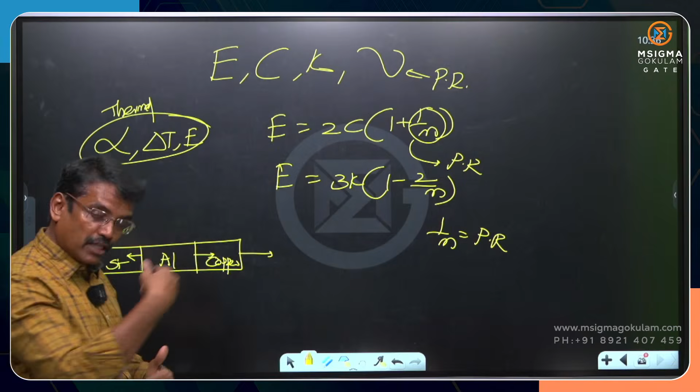Anything could happen. How to write the force balance: if you want to write the force balance for aluminum, take a section here. Left hand side forces must equal the right hand side forces, based on which we can decide whether it is compression or tension. If it is under compression, definitely there will be a decrease in length. So the total elongation of the member will be the elongation due to tension minus the decrement due to compression. So this is a very easy and prime area.

And stress strain diagram. Okay. And there only comes the proof resilience or modulus of resilience and the modulus of toughness. What is the proof resilience? Maximum strain energy stored up to the elastic limit per unit volume. And toughness, what is the meaning of toughness? Try to recall those properties.

Okay, the properties of the materials, proof resilience and modulus of toughness, and what is the meaning of strain energy. Strain energy concept is very important. Recently in 2023 also, a question asked in SOM was regarding the strain energy, strain energy due to the self weight. Okay, what is the strain energy? The energy stored inside the elastic member because it is undergoing the strain.

It is like a spring. When you compress the spring, there is energy stored inside the spring. When you elongate the spring, there is potential energy stored inside. In a similar manner, when an elastic member undergoes a strain, there is an energy stored inside that. That is called the strain energy. What is the maximum strain energy stored? What is the strain energy stored per unit volume? All these things are very relevant in the SOM.

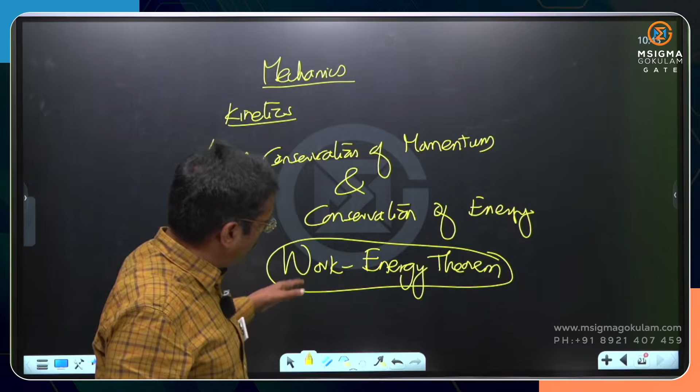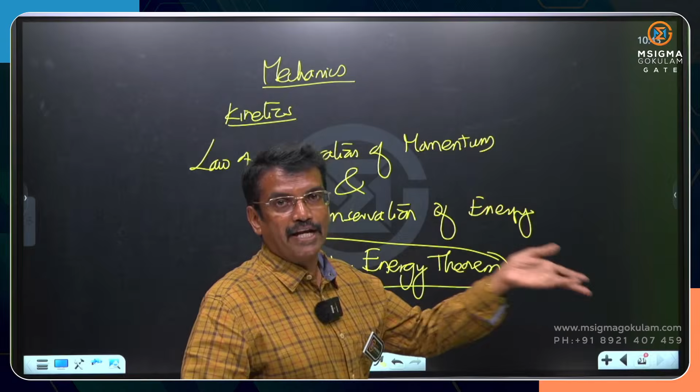Work energy theorem: problems on the work energy theorem are very prominent in the mechanics problems. Mechanics weightage will be around 4 to 5 marks. Problems on work energy theorem as far as the kinetics part is concerned, and kinematics also will be there. They are asking to calculate the acceleration in a particular direction, by writing the basic equations of kinematics without bothering about the forces, how to calculate the acceleration of a body along a particular direction. Okay.

Give more focus to these particular topics. And when you come to the theory of machines, the planar mechanism, the inversions, and the slider crank mechanism. The type of inversions you get there, and the degrees of freedom, is one area, and above all, vibrations.

Vibrations is a particular domain where you can definitely expect 2 marks, in the critical damping ratio. Give more focus in that domain of the critical damping, the natural frequency of vibration, and when do you get the resonance. Those are the conditions where you have to focus more regarding the vibrations.

Design is, of course, design of the welded joints and design of the riveted joints. The weightage will be around 3 to 4 marks. They may come from either the design of the riveted joints or the welded joints, or maybe even the design of the gears. Sometimes they may ask questions there.

And coming to the other important area called production, manufacturing. Casting questions will be quite easy. The most commonly asked casting question is the solidification time. As far as casting is concerned, solidification time and the time required to fill the mold, that is another common area they may ask, where definitely we have to write Bernoulli's equation. Time required to fill the mold by using Bernoulli's equation, and of course casting defects. Give more focus to these domains in casting.